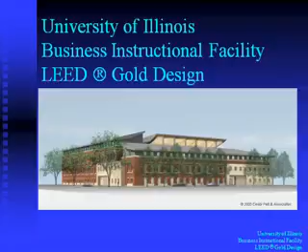As Gary said, I was involved in the project basically from schematic design. I wasn't involved in the conceptualization phase, the feasibility phase, but I came to the university in fall of 2003, and they were just about to get started with the construction documents for the project, and I was asked to be the project manager because I had expressed an interest in and really a passion for sustainability, and this was the campus's first project.

So I've talked about the building a fair amount, both while it was in design and since then, and kind of tried to isolate some of the key things that were really important with this building to its success. And it is a successful building. In the title of my talk, I am going to talk about some of the things we don't know yet about the building; how successful it is remains to be seen in terms of some of the sustainability concepts. Certainly its energy efficiency we won't know until it's been performing for a while. But the design process itself was an incredible success.

So much so that at one point some of my bosses at the university essentially said, well, this was supposed to be a project that was kind of the benchmark. We were going to see how well we could do sustainability on the campus, and then we would make a decision as to how high to set the bar for the campus. And when the project design was all done, the bids came in good, the response that we got was, well, I don't think we're going to shoot for gold, which is what this building is attaining, because we think the project actually went too well. We don't think we can repeat that.

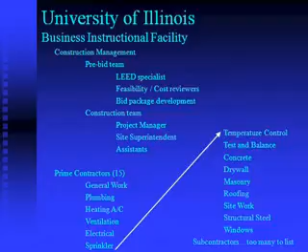And out of this whole group, I meant to highlight this, the design architect, the environmental consultant, the lighting designer, and the LEED specialist for the construction management team. That's about 8 people total maybe that were directly involved in the project that had actually done a green building before. Everybody else had not. So this was pretty new territory and meant a tremendous amount of coordination.

And the third key to success that I mentioned was the consensus building. The university has a pretty high level of building standards at Facilities and Services. So in some senses, it wasn't that hard to build consensus among the people that had developed those standards, because they understood that building buildings that are durable, efficient, and easily maintained is in the interest of the university, because it costs them money to do those things.

Some of the ideas that they thought were kind of far-fetched, we were able to build some consensus with them by leveraging those existing understandings and beliefs that buildings need to be durable, and help them to see that some of the things we're talking about weren't really that far out there. They were actually going to make their lives easier. And sometimes we had to understand that the motivations for doing a green building were different across the board.

For instance, the Business College, I think their main motivation was marketing. I think they understood that they could get donations to the project that they wouldn't otherwise get. They understood there was a real groundswell around green building across the country, and that they might be able to really inspire future students and the donors to the building, and it succeeded.

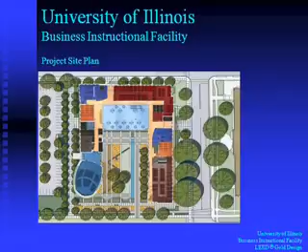One of the things we discovered was that in modeling the building, the peak cooling load actually occurs in November for this building, because once the sun drops, the sun is actually getting into this space through that 4-story atrium, and there's a tremendous amount of heat gain. So the model showed peak cooling in mid-November, right about now. So it'll be interesting to see. They do some internal shading.

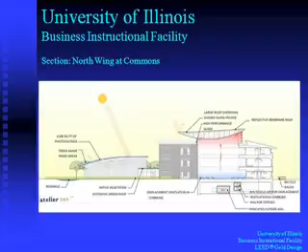And this shows the photovoltaics are to be located on the top of this. There's a green roof area on this connecting link. And I think there's a reflective roof membrane, which helps with something called heat island effect, which is heat that gets developed around a building because of all the dark surfaces. And I think this slide did a really pretty good job of communicating all that. It's a kind of picture that often doesn't get done for projects, but as I said, this company, Atelier 10, understood that they needed to really communicate well to this client.

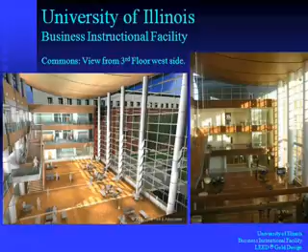But it's just one of those things that happens on projects where apparently, and I've heard a couple of different versions of this story, they were included, they were in the construction documents. Presumably the university purchased them, but the design for them was somewhat lacking. There wasn't a lot of information. They weren't a purchased item off the shelf. It was, it should look like this, and the contractor bid it, but didn't really know what they were doing when they bid it, I guess.

And when they submitted what they had planned to construct, it wasn't at all what the design team wanted, and the using group didn't want it, they didn't like what it looked like, and it just ended up removed from the project. And I think that happened partly because all this great consensus building is wonderful, except people leave. I wasn't there anymore. None of the people that worked for the design architects were there anymore. They had all moved on to other jobs.

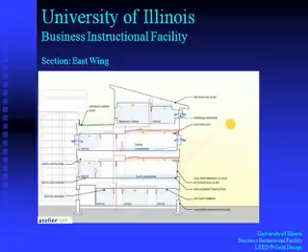The people involved in the construction weren't aware of the importance of these, so they got eliminated. The good news is they did a lot of daylight modeling. This is another image that was done by the environmental consultant showing the potential for daylighting a good third of the space in these classrooms with daylight, and they did end up putting in daylight sensors so that lighting is controlled. In other words, lights are turned off when the daylight is adequate in that portion of the room.

And they didn't model light shelves. So their idea was, we know it's going to work, and the light shelves should just add to it. What light shelves do is bounce the light further into the room. But since they didn't use it in the model, the lighting is adequate the way it was designed. It just would have been even more adequate.

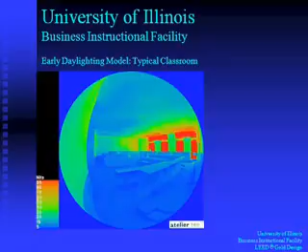I'll kind of skim past some of these, but they did a lot of communicating about what different choices would mean in terms of energy delivery methods and lighting efficiency, and communicated that through these kinds of images to the campus in terms of making choices about systems. What is the metric there? I'm sorry. This is okay.

This is actually describing what the benefit of daylight sensors in the offices will be. Now, that's just the offices. So recognize that this building is actually pretty classroom intensive. So it's just saying, should we bother to put daylight sensors in offices as well as, say, classrooms and public spaces? And what this shows you is that this is the design case with no daylight sensors. In other words, this was the baseline that you're measuring your energy efficiency against, ASHRAE 90.1. And the building, as its energy systems were designed, was going to give you 43% improvement over that.

But to just add, let's see, design case only classroom daylight sensors, you could improve 1%. And then design case classroom and office daylight sensors, you go down another 2%. So they were basically showing you the improvement of the overall building energy consumption for adding daylight sensors in classrooms only versus classrooms and offices, you went down 1% and then another 2%. And honestly, I don't remember if we ended up putting them in the offices or not.

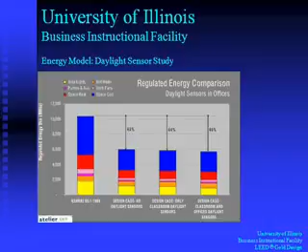And fortunately, the environmental consultant and the architect are both located in New York City, and they would go to each other's offices, and they worked very collaboratively and eventually came up with the facade that the building design ended up with. And it's actually successful on both levels. It's quite beautiful. It's a much more articulated facade. There's lots of nice architecty terms for it, but anyway, it's quite beautiful, but it also functions well, and it would have functioned even better if it actually had the light shelves.

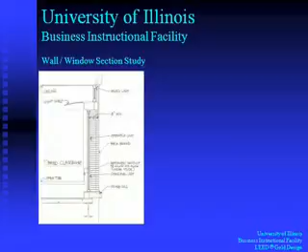And then this is talking about the triple glazed windows. This is another element of integrating design that was brought into the project. These are an expensive window. They have a double insulated glass element, and then an interstitial blind component, and then another piece of glass that adds both energy efficiency and also keeps the blinds protected because they're inside the glass, so they stay clean and they're used and they're protected.

But they're expensive, and so to determine whether they were a good fit for the university, they did a lot of energy modeling to see if there was enough payback just putting them in on energy. Unfortunately, the university's energy budget and their capital projects budgets are not connected. So the college didn't care if they were going to save energy. I mean, they did, but the dollars saved on energy in the future weren't going to impact their budget. It was something that was outside their realm.

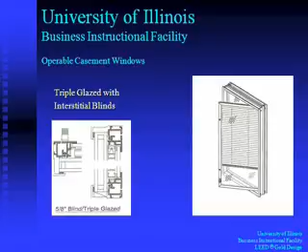But what did impact their budget was what's called perimeter heat, which in the university's building standards is required at all windows and facades that have glazing. And so for this building, the red on this slide is where they did end up having to put in perimeter heat. But what you don't see along here at all the windows that are punched in this building and up multiple floors is perimeter heat. In fact, they were able to demonstrate through modeling that the improvement in the temperature inside those triple glazed windows was adequate to give you user comfort, which is really what the perimeter heat is for.

It's a backup system, but it's also mainly there because of the perception when you're sitting by a glass facade like this. If you're too close to it on a cold day, it feels really cold, and you get a lot of complaints, which leads people to crank up the heat, which leads to increased energy usage and system problems. So they were able to demonstrate and actually eliminate the entire perimeter heat system, which in turn obviously paid for the increased cost of the windows.

So, was that a variance that you had to apply for? Yes. In fact, that's where these pictures come from, slides that were done for that variance. Was there argon in these windows? No, they're just airtight.

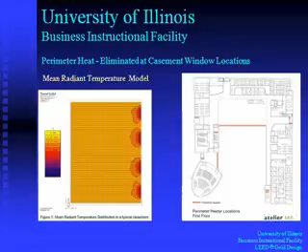And then this is another slide that was done by Atelier 10, just in early days, to communicate to some of the engineers in the facilities and services group how the systems were going to work. I'm not an engineer, but I think this is one of the elements that was talked about in the feasibility study. There was some discussion of having something called a labyrinth to supply the air, and that would be what it sounds like, a labyrinth with a buried concrete construction that the air flowing into the building goes through, and it tempers the air so that by the time the really cold air from outside comes through this labyrinth, it actually is not as cold and therefore doesn't require as much energy to heat in the winter, and vice versa, cool in the summer, because the temperature of the earth is much more stable.

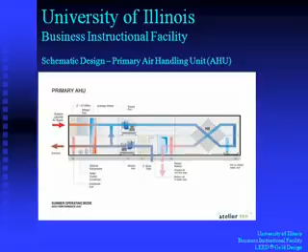In the end, they eliminated that idea. It was very expensive, and by the time they'd made the building so energy efficient through insulation, good windows, displacement air, and all the other strategies that they chose, they didn't really need this element. And it certainly wouldn't have had a good payback because they'd already lowered the energy consumption so much. It's a concept that's been done by Atelier 10 on some projects in Europe. But I think that it was a helpful tool to think about what are the sources of energy consumption in a building system, and where can you realize the best performance and the highest savings.

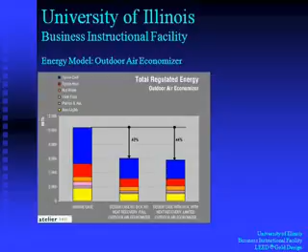And this way they could actually bring the air in at a higher temperature. It's at the temperature that you're trying to attain, and the bodies actually develop this sort of plume effect of driving the hot air and contaminants up to the ceiling level where they're pulled out of the building through the return ducts.

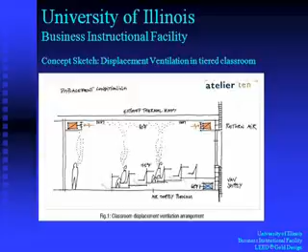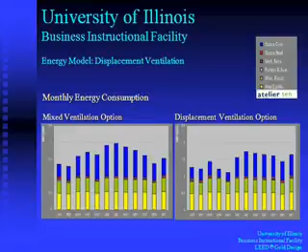More modeling stuff, and since I'm running short on time, I won't talk about this too much, but this is, again, modeling the mixed ventilation, which is the typical delivery system for forced air systems, and the displacement ventilation. And you can see, this is a month-by-month model, and it isn't across the board more efficient. Apparently in January, it's more or less the same on this model, but when you get into the summer months, you see some pretty substantial changes in the amount of cooling required.

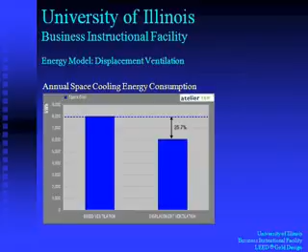They're a very low level of a thin plant medium, with sedum type plants that spread out over the area, and they create a nice cooling effect on the building, but they aren't visually all that interesting. And they also filter water and so on, some of the other things that green roofs can do.

Unfortunately, what happened here was, again, inexperience, I guess, on the part of the structural engineer. They designed the beams adequately to support this deeper system, which is designed to hold more interesting plants, bushes and shrubs and flowers, and it was going to be a beautiful garden right outside these faculty offices here. But apparently they didn't specify the correct roof deck.

And so apparently they came to the point when they were about to install some pavers up there for a little patio area and then this deeper roof material, and somebody caught it and said, no, the deck that's on there, and it was already on there, won't support that between the beams. So in fact, this is all the extensive type. It's the thinner material. And for those of you that go over to look at it, I think I have a couple of images of it. It's kind of sad looking right now. It mostly looks like gray dirt.

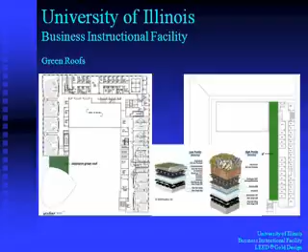And this was another, I think, important lesson that the university is trying to understand, which is that after this building went up, which is the architecture building, there was a hue and cry about the horrible nature of having huge glazed facades on buildings, because this building performs very poorly. It's west-facing glass with offices that are just like little bake ovens a lot of the year, and the energy consumption of this building is really high.

And so when this building design first came to be shown, they kind of felt that they were going down that same path. But actually, because of the overhangs on this building, I think they were able to demonstrate that we're pretty sure this building will not have the kind of issues that building had.

In the sustainable sites, they couldn't go for brownfield development because they were not a brownfield site. And one of the points that we tried for that the university would not consider had to do with alternative parking arrangements. You can get a credit by having spaces available for alternate fuel vehicles or for van pooling or carpooling. And unfortunately, parking on this campus is a real political nightmare, I guess. And the parking folks wouldn't touch it with a 10-foot pole. They basically said, we have enough headaches as it is, we're not going to deal with it. I think in the future they will, but they just weren't ready on this project.

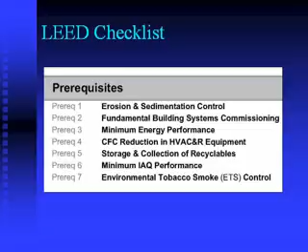They met all the prerequisites for the project. One of the things I think a lot of people don't know is that LEED has all these prerequisites, and one of them is environmental tobacco smoke, which essentially amounts to you can't smoke in a LEED building. I mean, there are ways to create completely separate air handling systems for a single space in a building that I think they allow, but almost nobody does that.

I already talked about that. They're getting almost all the water efficiency points for the project, and possibly even going for a point where they are exceeding. So they're expecting to reduce water consumption over the Energy Policy Act of 1992, which was the standard for the particular LEED that we were following, by 30%. They're looking at this point, I believe, at 51% energy savings over ASHRAE 90.1-1999, which will get them eight credits for energy.

And as I understand it, because it's a high-profile project and the College of Business is really gung-ho about green, they're actually purchasing green power, which is another point you can get. And this is sort of an interesting one because it's not really specifically related to constructing the building. It's actually more operational. Do you want to pay a utility for green power? And they're doing that for, I believe, 2 years, where they're providing 50% of the electrical demand for the building through green power.

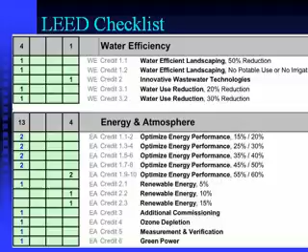The building will achieve the certified wood credit. And for those of you that come through the building with us later, there's a lot of wood in the building, and that means they've succeeded in obtaining a certain percentage, I forget what it is under this particular version of LEED, of wood that has been certified as sustainably forested through the forest... I can't remember the term.

Group that does it. And they also succeeded in getting credits for recycled content and for local and regional materials, and exceeding those to a point where I believe in their final submittals they're going for what they call innovation credits for higher levels even than LEED originally specified for recycled content and for locally and regionally harvested materials.

Let's see. Oops. The matrix, what does it mean? The left side 13, right side 2? Oh, well, back up to the top. Oops. Should have included that on the very first slide.

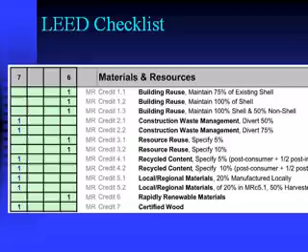This is their final version, I believe, before they submitted their sort of checklist of how they are doing. Early in the project, they had these high, medium, and low columns. If they were very confident they could get it, they would put it in the high column. If they were not positive yet, they would put it in the medium and low, and then NP is can't do it. Like I mentioned, the brownfield can't do.

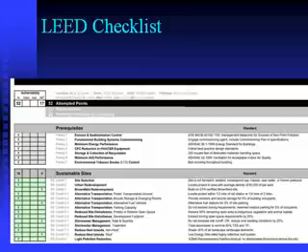So this final one only has things in the first and second and last columns because this is after construction is almost done. So we know they're either getting it or they're not. There's no ifs left. So that's what those are all about. And those numbers at the top are just totals within the categories.

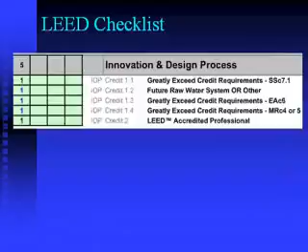So this last couple slides, this is a slide that just talks about some of the things that the environmental consultant told me in terms of the final outcomes of the building, that in terms, again, of the model of the energy consumption for this building, they anticipate 51%, or they did find in model form 51% savings in terms of energy cost, 47% in terms of actual energy use. I guess that has to do with the type of energy that you've actually saved.

How it performs will be something that the university will measure over the next several years, but the model looks very good right now. The PVs are, now she had told me 4.7% of the building's energy, which will earn a credit. I think you have to earn 5% to get the credit, so I'm not sure what that meant, but those are not yet online. So again, another thing that we don't know is how well are they going to perform, and will they provide as much energy?

The percentage that they provide is dependent both on how well they perform and how much energy the building actually consumes. But the way you get the point for LEED has to do with how you model it, not how it actually performs. So I think it'll be really interesting to find out how it really does.

This is a known: they did manage to divert 83% of the construction waste from this project from landfills, and that's huge. I mean, the amount of construction waste that comes out of a project is gigantic, and prior to this project, the campus didn't really have any requirements for construction waste diversion, and a lot of the contractors that came onto this project sort of said, oh, there's nowhere to recycle stuff. We don't know anything about that. And luckily, the construction manager was pretty much charged with making sure they did, and there was a lot of communication about that early in the project. I think in my next slide I talk about some of the lessons learned that the contractor talked about.

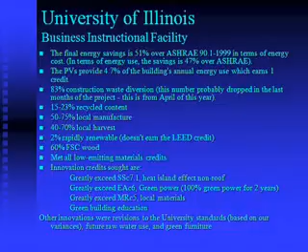So these were some of the comments that the construction manager had, that there was a huge learning curve for the contractors because not one of them had ever worked on a green building, and they were unfamiliar with the paperwork, and they really weren't sure why they had to do all of this, and there had to be some pretty aggressive hand-holding and/or penalties that were inflicted on the contractors for a while before they got the idea of particularly the recycling, and also that, for instance, they can't just come in, run down to Menards and grab the adhesives that they're used to using, or the caulking gun that they're used to using, and just come out and use it, because those are the materials that contain a lot of the volatile organic compounds.

But they did learn, and over time they got the hang of it, and some of the contractors are now sort of the local experts because they can go on the next project and they've actually done it where their competitors haven't. And they did find recycling sources for most of the big materials, which is how they got the heavy materials, how they got so high.

They did complain about the paper. This is a green building project, and they felt like they were cutting down an enormous number of trees to produce it because of all the documentation. And the U.S. Green Building Council is going to all online credit reporting now, so that should improve in theory. But we all know we were supposed to be in a paperless society by now, and that hasn't really happened.

They talked about communication being really important, that end users, first day in the building, they're feeling kind of chilly, and they brought in space heaters, and they had to explain to them that, well, you have your computer CPU sitting right underneath the thermostat in your office, so the heat coming off of your computer is telling the thermostat that it's warm in your space and you're freezing. But bringing in a space heater is not the solution. It's learning to educate the end users.

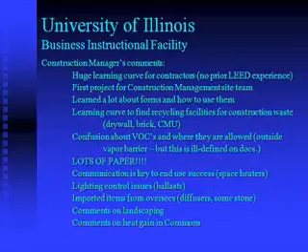And then there have been comments on the landscaping. Some people aren't that excited about the prairie look yet, and it will remain to be seen whether the grounds committees and workers on the university campus will actually maintain those as they need to be and not just come in the first year, dig them all up and put in sod when they don't like how they look. And I think I talked about some of the things, the light shelves being eliminated, the intensive green roof.

One of the first times I walked into the building, I got overwhelmed with a pretty strong smell of chemicals. And so I think one of the things we had tried to talk to the university about was the need to invest in green cleaning products specifically for this building. And I think when they were rushing to get ready for the big grand opening, there was some really dirty stuff on some of the rubber in the stairwells, and that was where I smelled it. And I think they came in with their really high impact solvents and started cleaning ferociously to get ready for these events. And man, it was nasty. But at least that's temporary.

And then I think there's a problem where this was an element that was designed to be solid wood and got installed with FSC certified veneer, but it's already coming apart because it's a place where students put their feet, and it's vulnerable.

And I think that's an element of sustainability that sometimes people forget, that it's no good for it to be a nice sustainable product if it's not going to last. And in this case, I'm not sure how that slipped by, because it's not. I did look it up in the documents, and it was supposed to be solid wood. So, and we don't know yet.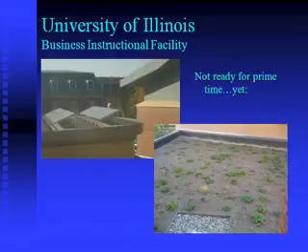These are not that attractive. That's the green roof as it looks today, and it's not going to do much over the winter. But I've seen pictures of green roofs that look like that, and within a year or two, they look pretty nice. They fill in. And there's the worker up there trying to get the remaining hookups on the photovoltaics on top of the auditorium. So, and that is it.

So, are there any last quick questions, or who would like to take a tour? Yeah. Yes. It's connected to the... I'm sorry. What? All the steam and chilled water come from Abbott. Yeah. It'll be measured, right? Yeah. Like I said, within the next year or so, I think the data will be coming in on the building and how it's performing compared to other buildings on campus.

And sometimes when people ask that question, I can point out, for instance, on this building, one of the alternates they had was for Minnesota limestone, which is what's on the building, versus Indiana limestone. And it was purely an aesthetic choice. It's beautiful stone, and the Indiana limestone quarries are pretty well quarried out, and what you're getting out of there is not very attractive. The university spent an extra $1 million for that Minnesota stone. It's beautiful, but it's certainly not any more sustainable than the Indiana limestone would have been. But having a beautiful building that people will respect and maintain and take care of is an element of sustainability too.